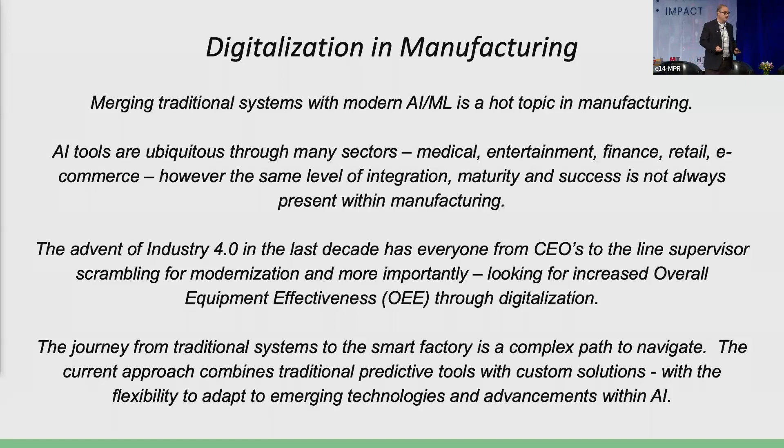Again, a big surprise for me in the last 5 years, and especially in a steel plant, because it's not language modeling, it's not a vision system, it's data. But surprisingly enough, there's plenty of ethical discussions that come up when we look at data, because data is power, and data can be skewed. As simple as the y-axis, auto scaling on a y-axis. That can make everything look crazy.

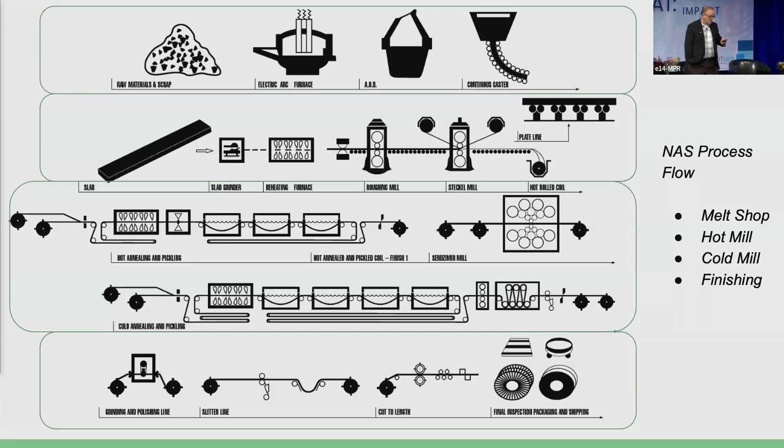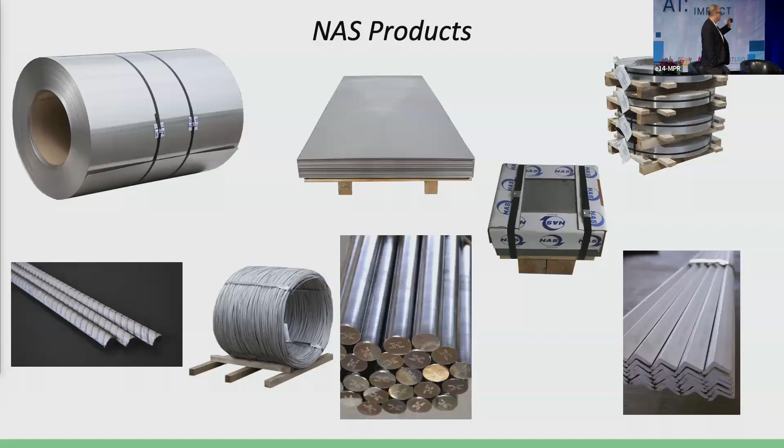It goes through a Sendzimir mill, which is this funny-looking 20-roll cold rolling mill. And then after all that, it goes through some final processing, cutting into pieces, and I'll show you some of our final products to give you context. So we don't necessarily make a final user product. This is the stainless that goes into refrigerators, beer kegs, mufflers, anything you might touch in North America. You see coils, blanks, sheets, and also we have a long products facility, which makes the rebar, angle, and wire.

Okay, now I'm going to zoom in. We have 1,400 employees. My department doing digitalization, machine learning, all that, 6 people. So we're a little stressed out, but we have a lot of power users out within maintenance, engineering, and the operations department. Our basic goal is to use data to assist in any of the main KPIs or OEEs. This is the Industry 4.0 that we saw earlier. The ones I have boxed are what I'm going to talk about, our specific use cases.

Big data is traditional machine learning that I'm going to talk about, and then on the other side is called cloud computing. So we're leveraging some third-party software to do some cloud use cases. But we have a little bit in every area within our plant: 3D printing, AGV systems, a little bit of everything. Cybersecurity, very important in the last couple of years.

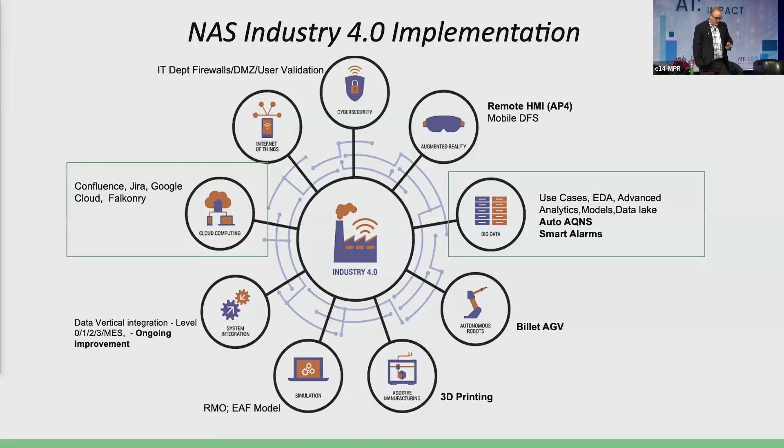These are some home-built dashboards that we have developed in-house in the last couple of years. A lot of it is not overly complicated, but it's data visualization, just to kind of push users into the data science side of things. So you'll see a lot of histograms, Sankey diagrams, flow charts, that kind of thing that we have a website set up. And one of our first projects was this smart alarm system.

So that takes data from real time and also contextualized. So I can say on the hot mill, if I'm running austenitic steel, I want this temperature to be within this range. So this is just kind of an advanced way of setting up alarms. And that system can send alerts to me on SMS or emails or anyone in the plant that subscribes to it.

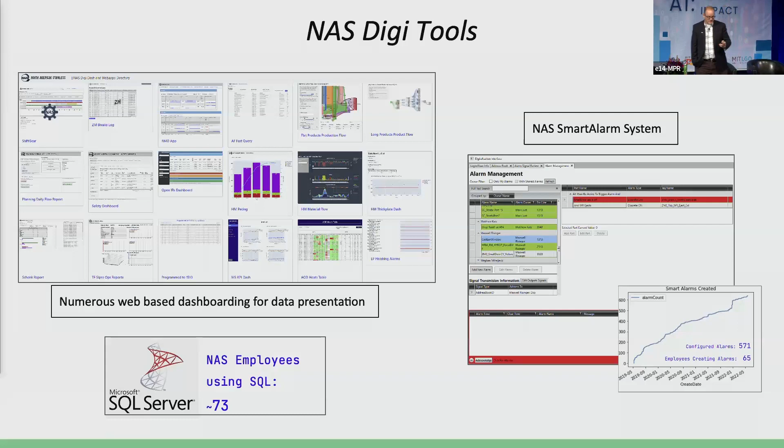Okay, so we'll jump into one of our use cases. The first one was actually done as a partnership with McKinsey several years ago, and McKinsey was here earlier, hit a lot of bullet points that were pretty much spot on as far as implementation of machine learning. This is going to be a traditional use case, XGBoost model, and if you remember, the first step was get raw material, put it in an electric arc furnace, and melt it. That's what this is trying to optimize. And the target for this process is the final temperature when you pour out the liquid steel.

I can't list all the features, but we'll take a look at the SHAP plot in a minute. But basically, we just took 2 years of all the historical data. A lot of it was contextualized, not necessarily real-time data, but contextualized data about what we ran and what it took to get to what we ran. And then, of course, looking at the targets. Once we build a model, traditional test set, split it. We'd iterate on it until we got something that predicted correctly.

And this particular use case checks off a lot of boxes, because if we can use less electricity to melt steel, that's going to help our CO2 footprint, that's going to help our costs, and it's going to help our throughput. So it's about the perfect traditional machine learning project we could find.

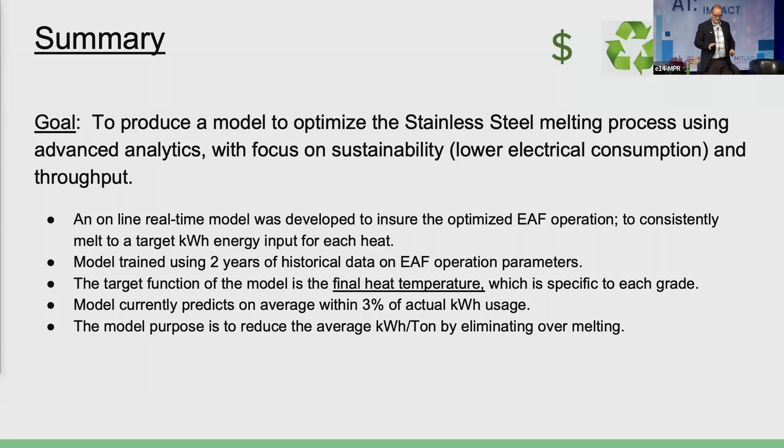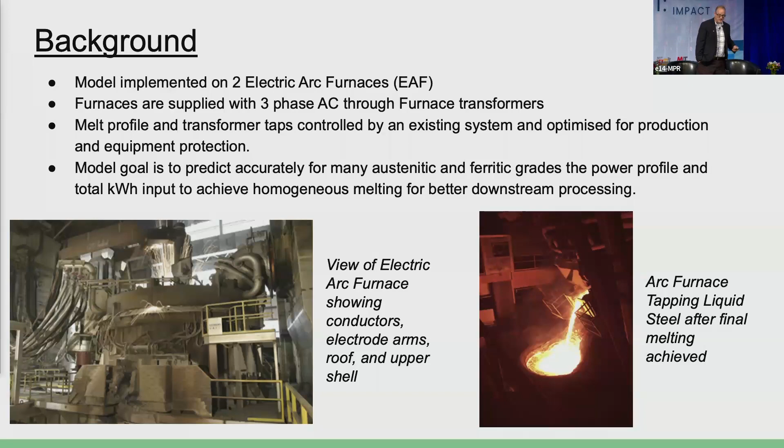The picture shows, this is the roof of the furnace. The electrodes come in here. It's 3-phase AC current, up to 80,000 amps, 1,000, 1,200 volts. And this is the shell of the furnace down here. The scrap's melting down in this area. And then you can see here, when it's finished, it pours out into a transfer ladle. This goes to the next process for refining, checking the chemistry, and then finally making a slab out of it.

The project approach, again, very traditional. All of the discovery phase, EDAs, exploratory data analysis, prep the data, data engineering, and then running through the models, iterating it, checking it. We had to do several things. I'll give you an example. We make austenitic and ferritic, about an 80-20 split. We have to have 2 different models for those because the targets are a little different, the scrap acts different, that kind of thing.

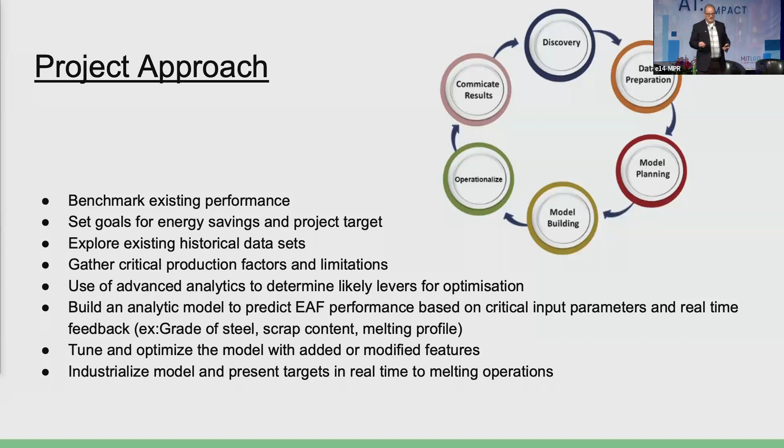So this results in about 2 to 3% benefit in kilowatt hours put in for each heat, which, a few percent may not seem like much, but this is 50% of our electricity we use at NAS. 50% is used to melt the stainless. The other 50% is to run the rest of the plant. So it's significant. A few percent is measurable.

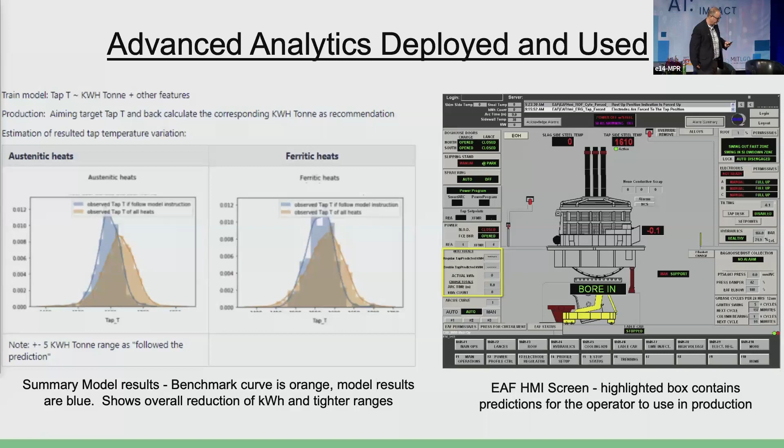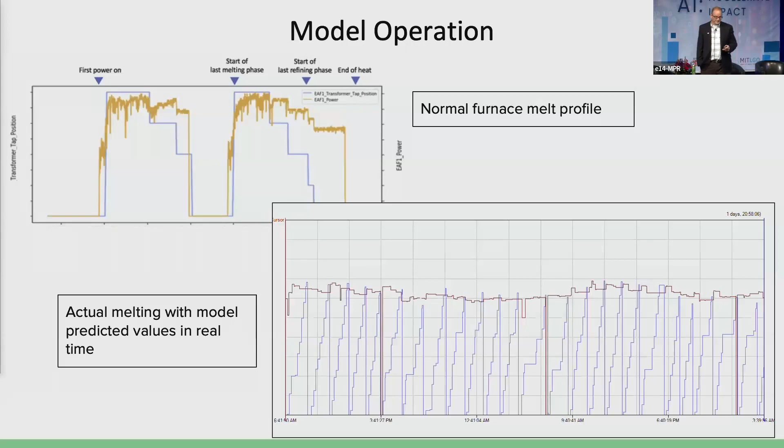Okay, moving on. I've got 6 minutes, it says, so I'll get through this fairly quickly. This is changing gears completely. The first thing we talked about was traditional machine learning. This is more of a generalized signal modeling. This is a use case we used with a company called Falkonry. So they have a product in the cloud which does anomaly detection, which I understand is not the end game, by the last speaker. But in any case, that's what we're trying to do with this.

Why is that? Because we have 30,000 signals. No one can look at it all. And I want to know if something's getting anomalous.

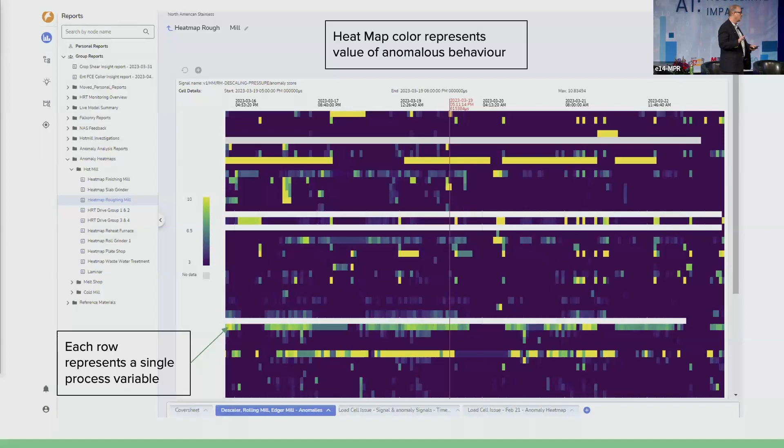And each one of these swim lanes is individual tags that I've sent to Falkonry to do the machine learning on. There's a scale here. So yellow is terrible, and then blue is like it's acting like it normally should. So normally we focus in on these. If it's yellow, there might be a data issue, something like that. But we just have this implemented in the last few months and are excited about where it's going. I'll show some examples of this.

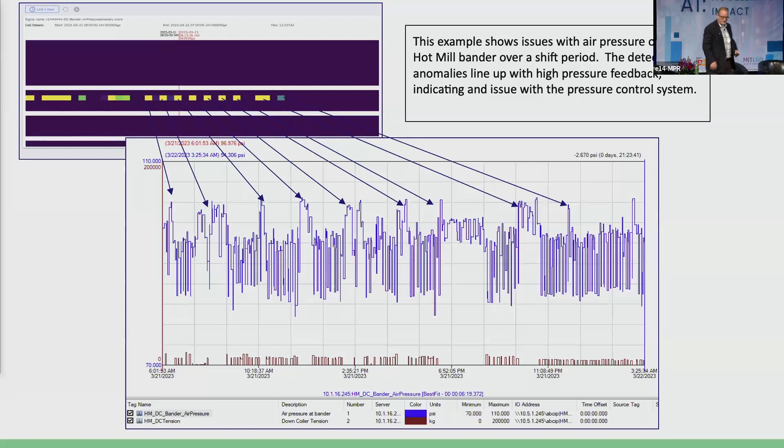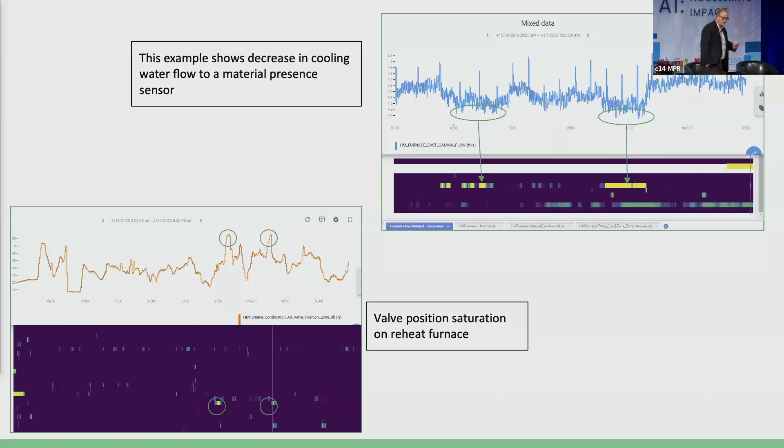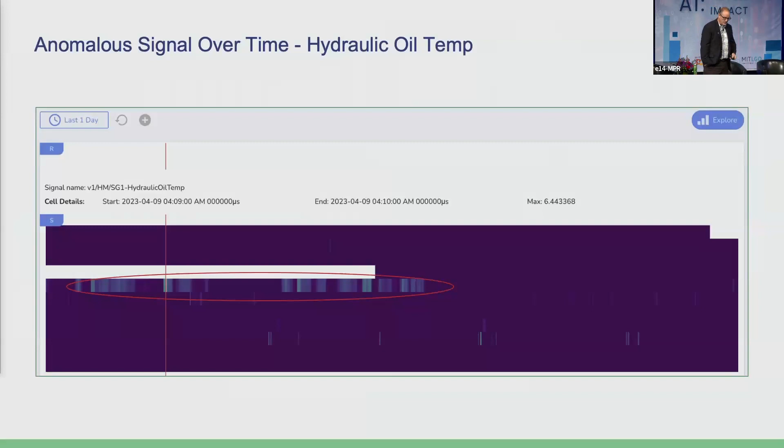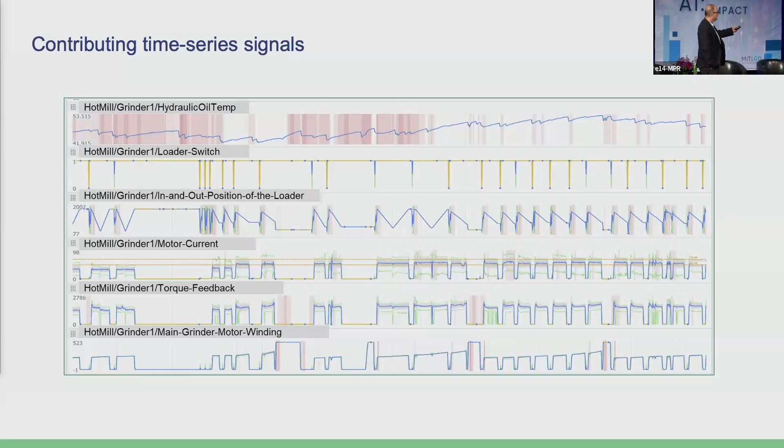I've got a few more slides on this that kind of step through the workflow, maybe a little bit better than the ones I showed you so far. So this is very strange, anomalous, not too much is going on here, but for hydraulic oil, so we want to check it out. When we switch over from anomaly score heat map to real time, it still shows what it thinks is anomalous in this area. And I can tell right here, this is kind of lower than normal, but some of these little step changes are causing havoc within the model's brain.

And then finally, within the same platform, the Falkonry platform, you can do these SVD charts. So here you can look at what it normally was for the last couple weeks versus what it was during the anomaly period. So you can actually see the range and maybe if it's acting a little different. So we're excited about this, still in the process of implementing it, as well as many other use cases in-house.

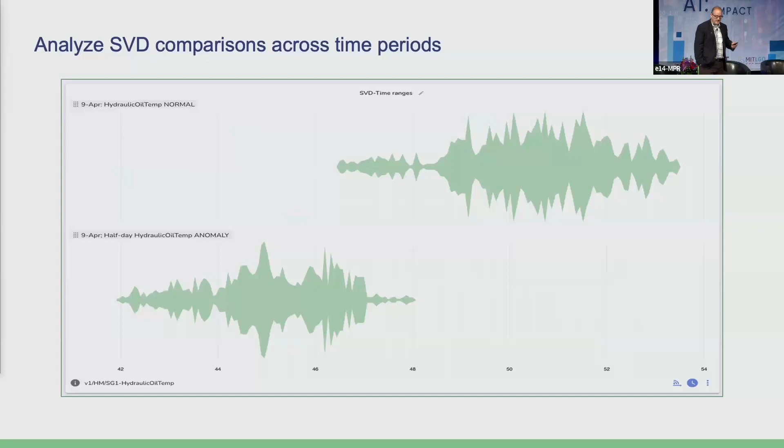I already mentioned some of the safety use cases. A lot of it has to do with predictive statistics with our safety database. And we are looking at this. On language processing, there's a lot of talk about it, and I'm not sure where it's going to land. So what we're doing right now is we're capturing all that data. We're capturing all the log files every 12 hours, from every line, every maintenance log, and we're putting that in SQL so that we can eventually use that for some machine learning cases.

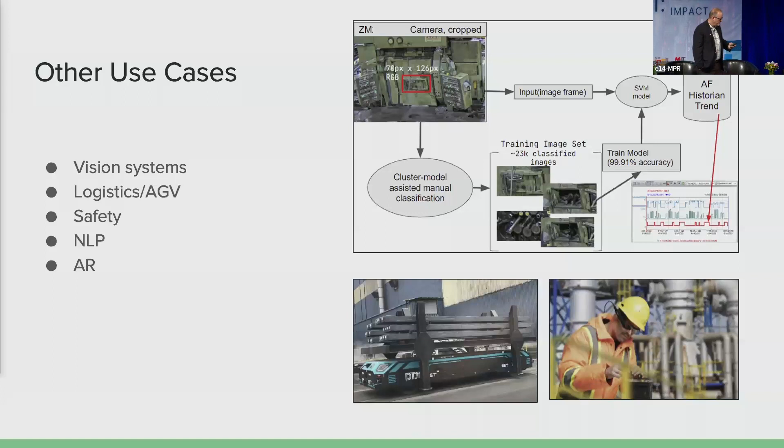Okay, that's pretty much all I had as far as slides, but I do want to circle back around to the pogo stick. So my impression is we're still within manufacturing, still got the pogo stick trying to do something, and we're still connected to it. We're still tethered to it. We're still using machine learning, AI, maybe as an assistant to the operations people and the SMEs throughout our plant. The good news is it's open for opportunity. Things are changing every couple weeks or every couple months, as you all know, and we look forward to what comes in the future.

What I've talked to them about and what we're trying to work on is contextualizing it more, and also giving priority with probably a little bit of supervision as far as which swim lanes or which variables we're really interested in. So we try to give maybe some additional weighting or something like that. But at the end of the day, someone that knows something has to actually look at it and act on it. So we're still not there yet on that.

Also, the platform itself, I think I showed you, will give you some violin charts, and it'll let you do some quick analysis on it. So we're working with Falkonry to get to a point where it can almost self-diagnose. But right now, there's definitely a lot of noise in there, and it takes SMEs to look at it.